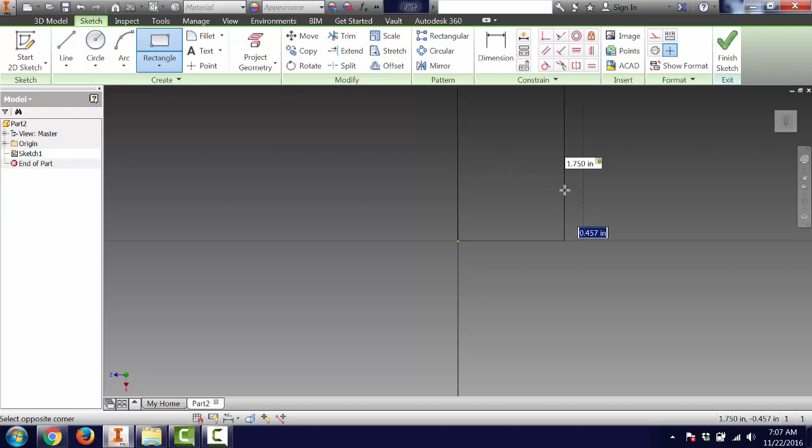Go into Inventor, open Part, click Start 2D Sketch, click on a plane. We're doing a rectangle, and it was 1.75. Hit Tab by 0.75, hit Enter. So now if I look at my rectangle, it is 1.75 by 0.75, okay, which is these dimensions right here. It's extruded 0.375, so I'm going to finish, extrude 0.375, hit Enter.

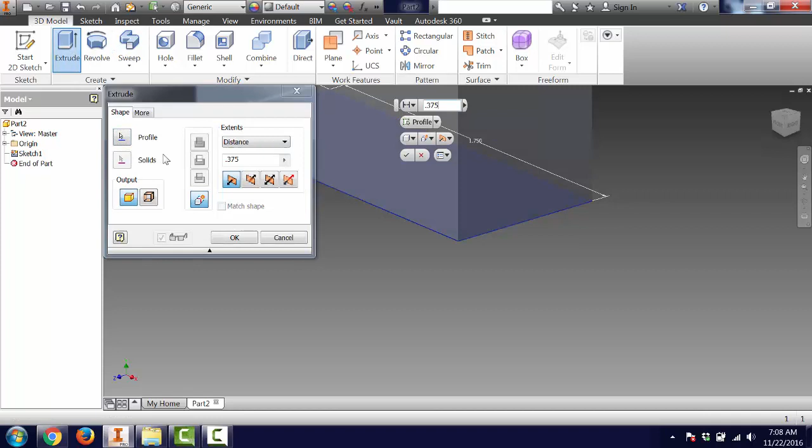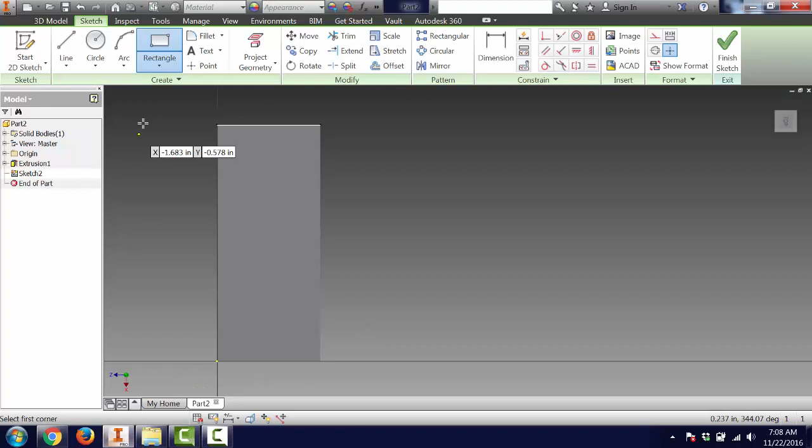Okay, there was another rectangle on top of that, so I'm going to start a sketch on that face. And I want another rectangle. That other rectangle is 0.45 wide, and then it's going to be centered, and it goes the entire length. So I'm going to go from here over. I know that my width needs to be 0.45.

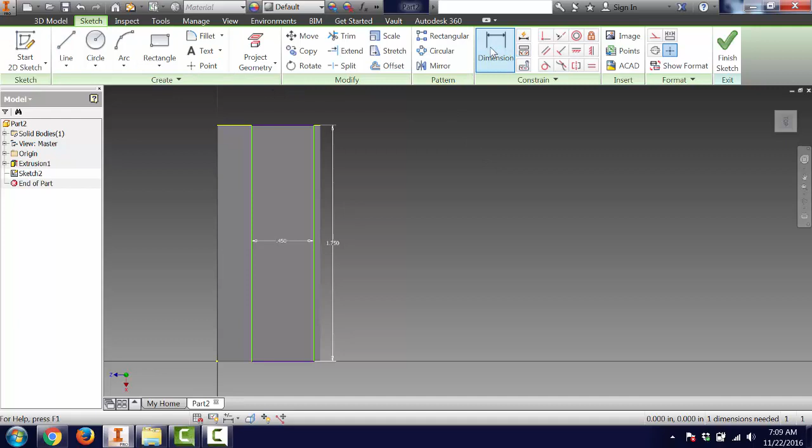Oh, whoops, it accidentally made my length 0.45, so we can fix that. I'm going to dimension from side to side. That actually needs to be 0.45. And then my length needs to actually be the entire length, which was 1.75. Okay. Now I need to get that to be centered up. So I can do that by dimensioning, and I want to go from this edge to here.

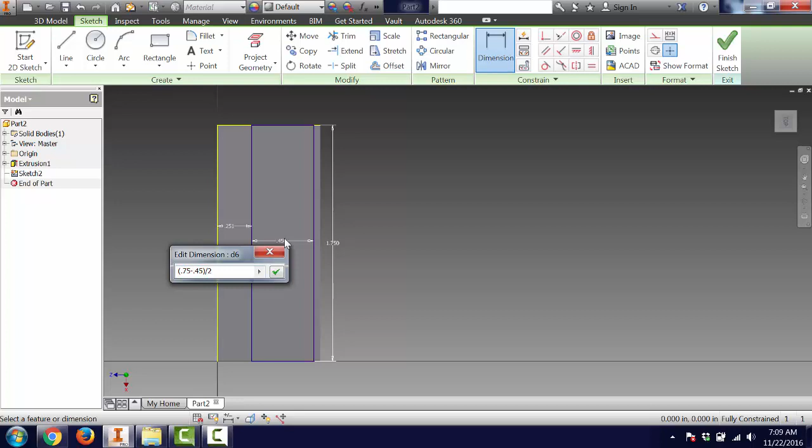And I know the entire width is 0.75, right, because we typed that in earlier. I know that the width of the rectangle in the middle is 0.45, and I need it to be centered, so I'm going to divide by 2. It'll just do that math for me. I could also use a calculator, but Inventor will do the math. So that has it centered up for me.

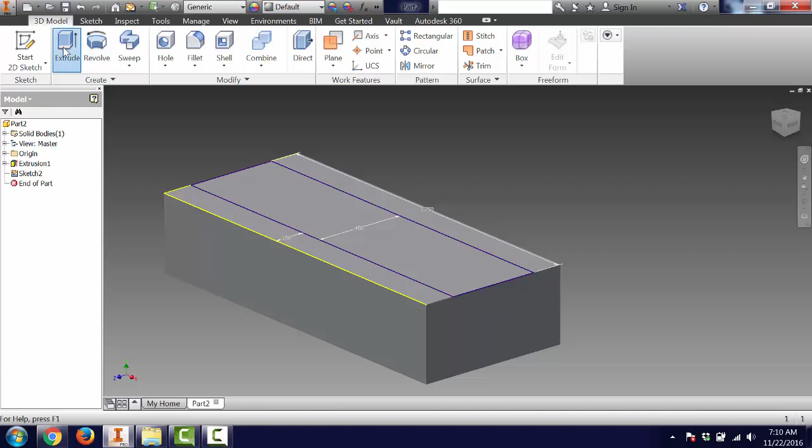If I come back, I know the entire height is 0.8125. So I'm going to go 0.8125 minus 0.375 for my extrusion. So finish the sketch, extrude this rectangle right here, and I know it's 0.8125 minus 0.375. Hit Enter. So now I've got my overall shape completed.

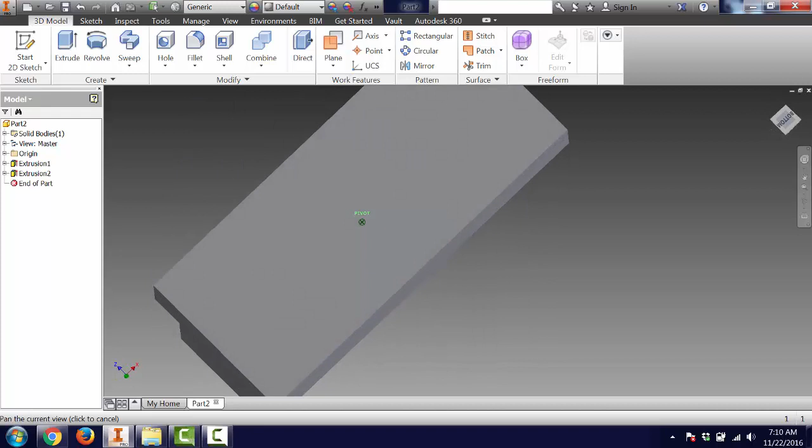Okay. Still need to put this point in the middle to do this hole. The point is centered up at 0.875 by 0.375 on that top bigger rectangle. So I need to rotate around so I can see this top bigger rectangle. I'm going to start a sketch on that surface. Okay, I'm going to put a point on there. And then I'm going to dimension. I want it to be 0.875. Okay. So that's the 0.875.

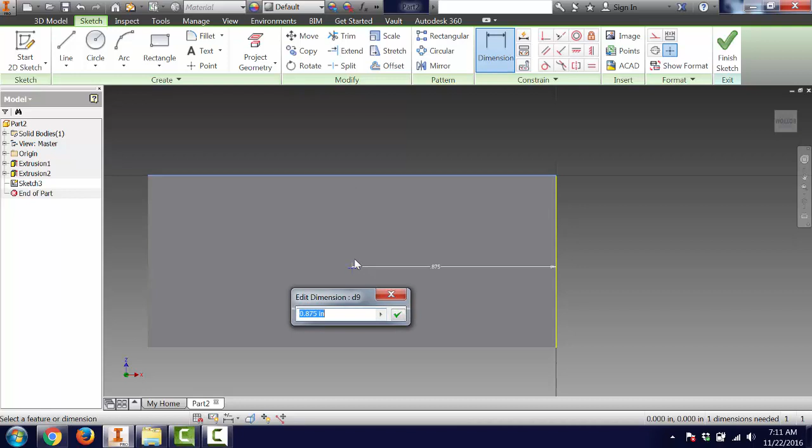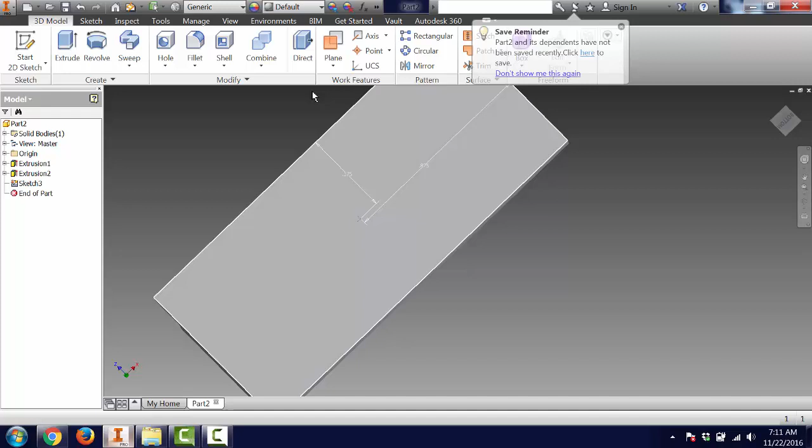And then 0.375 in the other direction. So dimension point up to here. And that's 0.375. Okay, so now I've got that nice and centered up. I can finish that sketch. If I look at the drawing, it tells me that the diameter of this hole is 0.1875 and it's all the way through. So I'm going to go hole, 0.1875, and it says it's going to go all the way through. I hit OK. Alright, so it's looking closer.

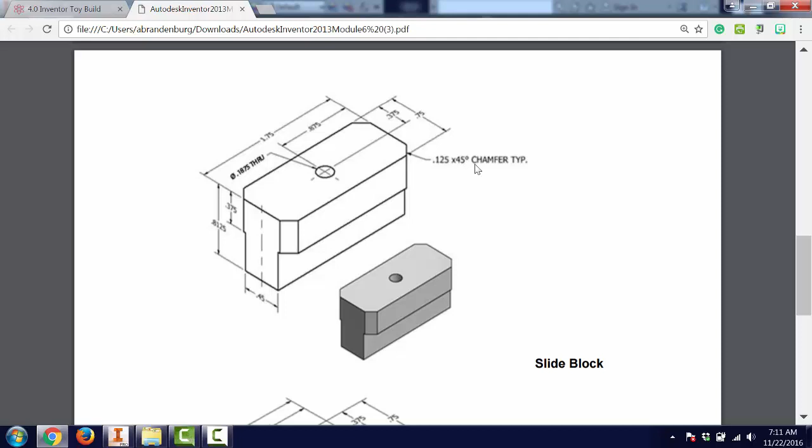There's only one last thing to do. That's to take care of these corners. It wants them to be kind of cut off. And if I look right here, it says that's a 0.125 45-degree chamfer. So I come in here. I need to drop down under where it says fillet. Fillet's more rounded. Chamfer's more square. So I click chamfer. And then it says 0.125.

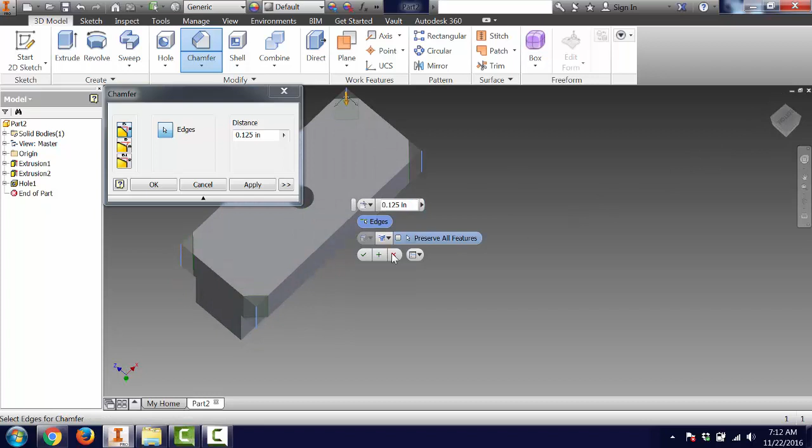Okay, so all I now have to do is click each of these sides that I would like to be chamfered. Okay, now that I have all of them, I can just hit the check mark, and now my part's ready. So I can do a file, save as, and this one was called the slide block, and then drop down up here and make sure I save it on my flash drive.